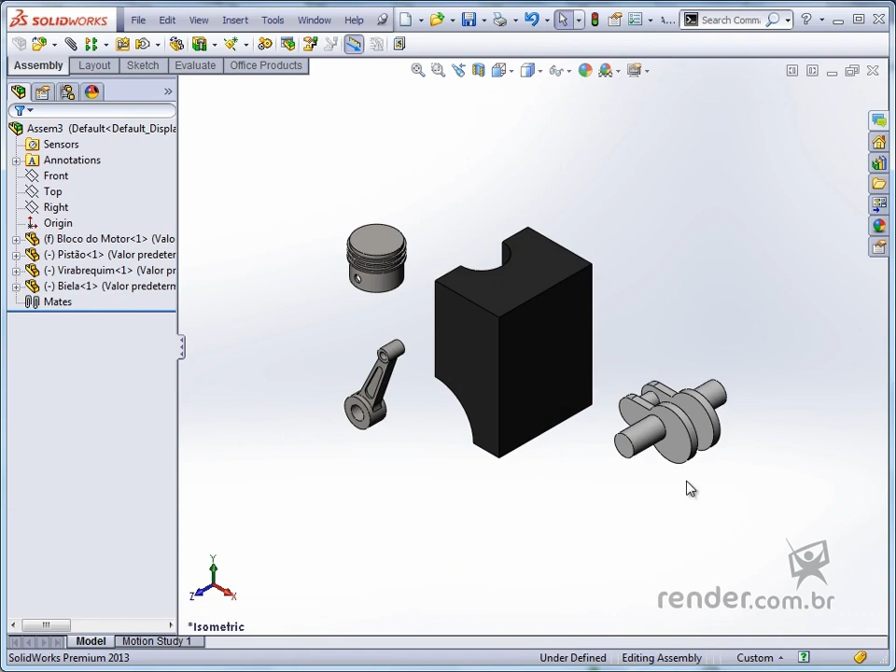We activate the mate command. Note the property manager. In the first box we select the entities that we will mate. Below we choose one of the positioning options. By default, SolidWorks always suggests an option considering the entities we select. For entities we can select faces, planes, edges, vertices, axes, among others.

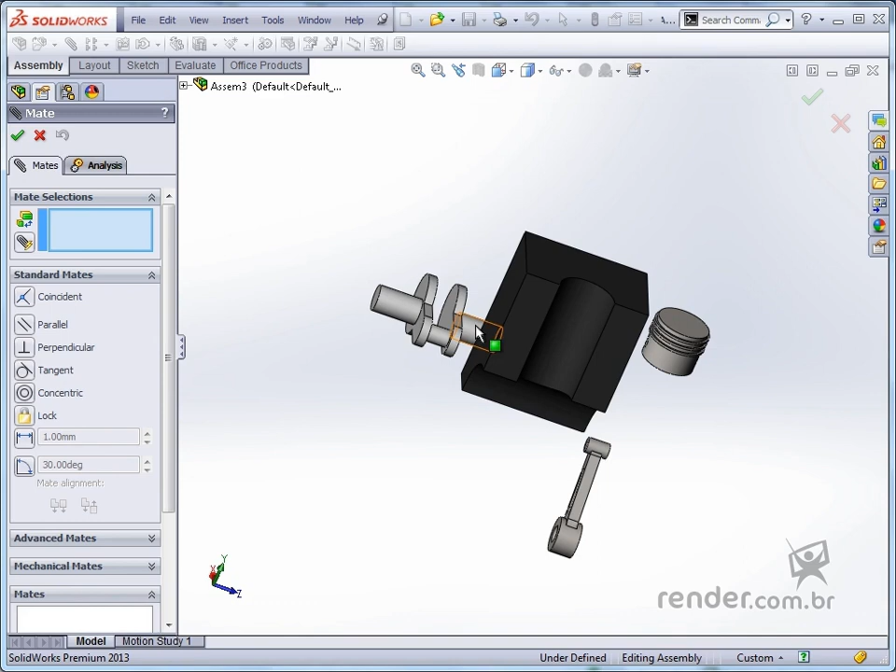We select the two faces shown. Note that the moving part has been positioned relative to the fixed part and that the floating bar is being displayed. By default SolidWorks applied the concentricity relation, which is the desired constraint in this case. But if we wanted to apply another restriction, just click on its icon.

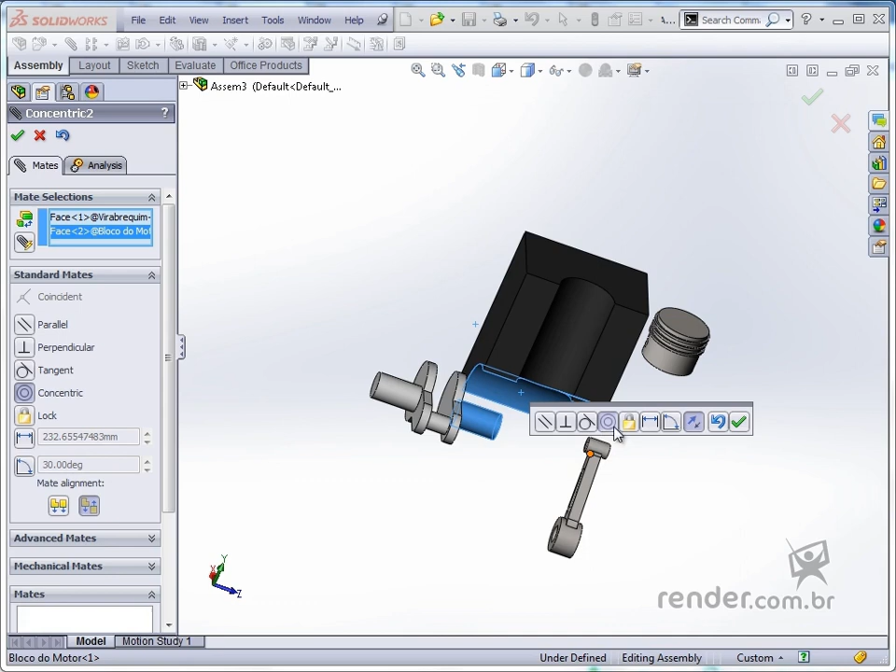We have confirmed, and note that the movement of this piece is now restricted, but not fully. To narrow it down completely, let's add another mate. We select the faces shown and apply the coincident relationship. See that now the only movement of this component is the spin.

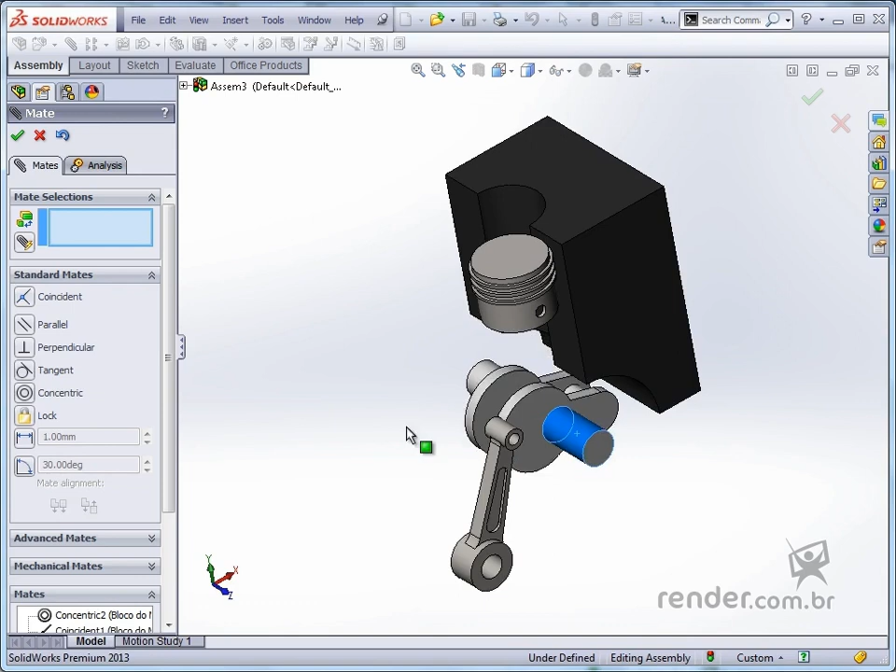Now let's get the connecting rod in position. We select the faces shown and define the relation concentric. We select the other two faces and set it to coincident.

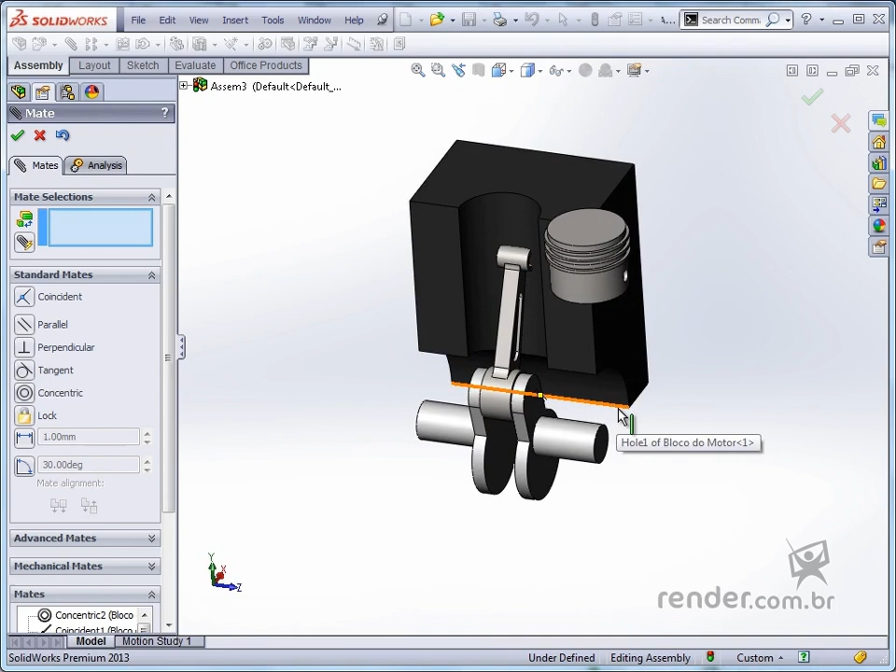Next, we will position the piston. We define a concentricity relationship between the faces shown. We define another concentricity relationship between the piston and the block. To complete the positioning, in the Advanced Mates tab, we select the width option to center one piece relative to the other.

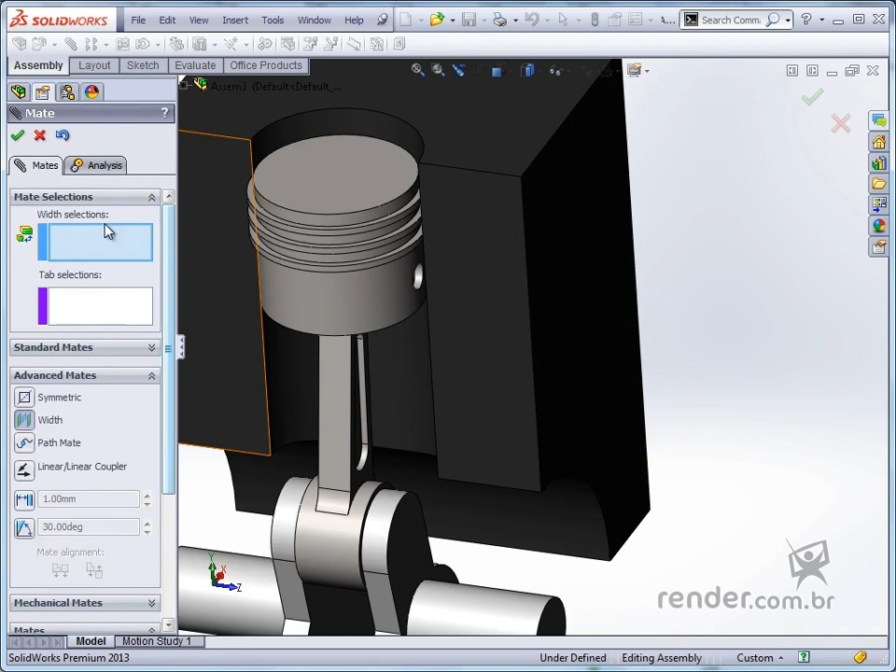In the first box, we select the faces of the connecting rod, which will be centered relative to the piston. In the second box, we select the face of the piston. Confirmed and ready, our set is completely restricted, maintaining its functionality. See, we can turn the crankshaft and visualize the movement of the connecting rod and piston.

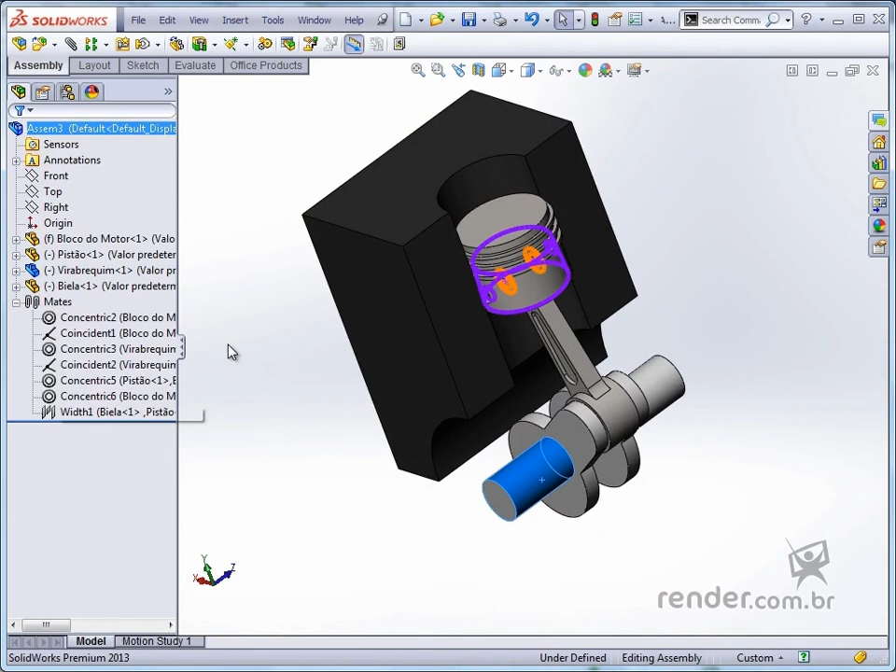We can edit the mates at any time because they are stored in the assembly. We finished this class, where we learned to apply mates, defining relationships between the components and simulating their actual assembly conditions.